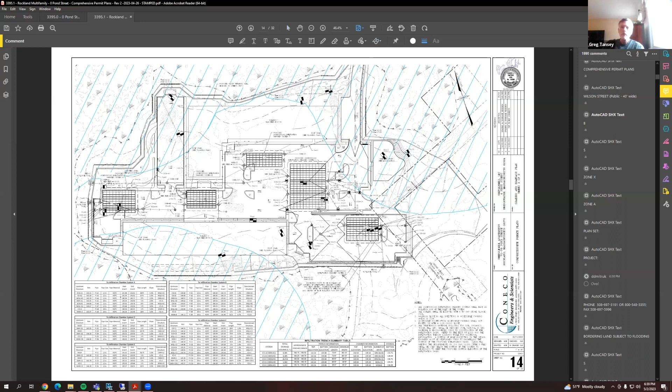During that process, we also performed additional witness test pits with the Novers. Me and Henry were out there, we performed four additional pits. This area underneath this system, an additional pit was performed here under this system. I believe that's the correct test pit location—yes, that is the correct one. A third at this extent, and then a fourth was done at the front of the site. So those are the additional test pits, performed back in February.

They indicate nothing significantly different than the information we had already gathered, but it was confirmation. A witness test pit is usually not required for stormwater, but given the size and scope of the project and Rockland's standards of work, we added those in, and we're happy to work with the Novers and Pat to get those test pits performed.

As Walter described, there had been some modifications to the wetland edge that came across via the Conservation Commission. Those flags needed to get rehung and surveyed. Again, not a substantial change, but given the time that has passed since the original flagging, there needed to be an update.

That update was performed along the front entrance of the site, and additionally around the main campus area of the property. With that, the retaining walls along the front access needed to be adjusted slightly, waving left or right to avoid getting too close to the wetlands, and recentered in those locations.

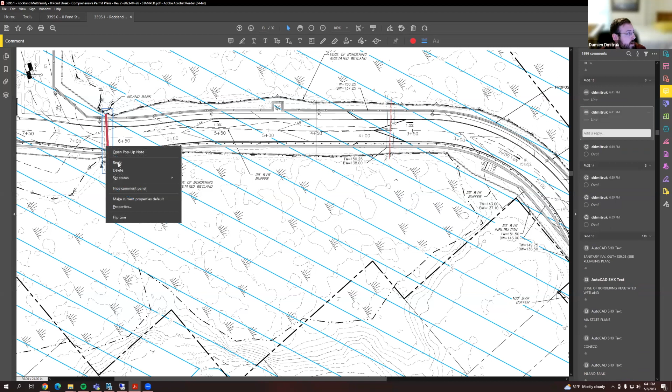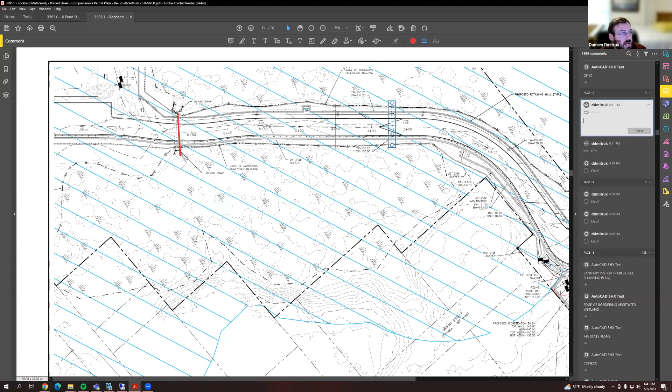There was a concern during the Conservation Commission meetings about analyzing those pipes during construction for their structural integrity. To avoid having those issues come up, we've designed some precast concrete structures that will just overtop those pipes.

So we'll have our existing grade, and this will allow for wildlife crossing, with additional benefits if there's ever a need for replacement or repair of the pipe - easier access rather than having to bring up the road or cause other impacts to the wetlands.

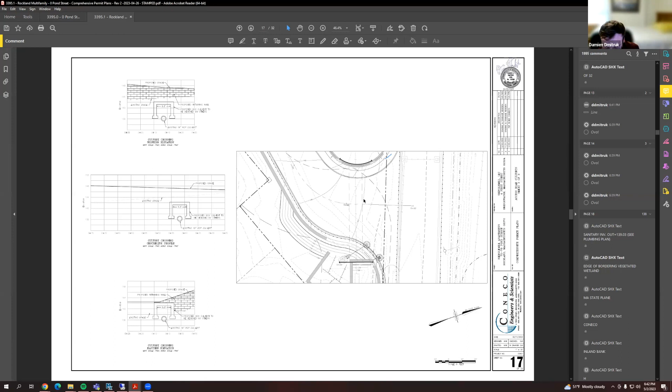So that's a major adjustment that has come from the project. I also went through the drainage design, and then minor things such as fencing.

Let's get back to the layout page. Again, this parking area has been brought in slightly closer, away from the vernal pool here. This lot is still going to be cleared - there's an existing property and home here. We added some fencing around the edge of it, which will be a landscaped area outside the 100-foot vernal pool and wetland buffers.

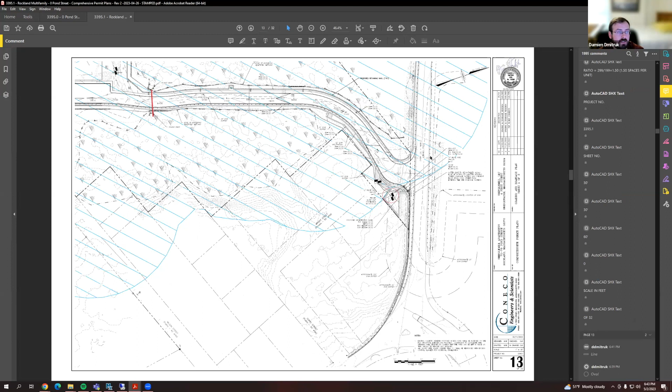Erosion controls were adjusted slightly, so minor changes along those lines were also brought into the plans. But for the most part, the general design intent of the site remains the same - the scope of the layout falls within the same parameters to the greatest extent.

We just went through some further drainage design, adding additional chambers based on the analysis from when the site was peer reviewed. So that's the general scope there.

Again, open to questions, understood. We'll leave it, as Walter stated, to give the board some time to really sink their teeth into it. We understand it was submitted, but wanted to bring it back up into everybody's attention as we're moving forward with the process.

You're on mute, Rob. All right, there we go.

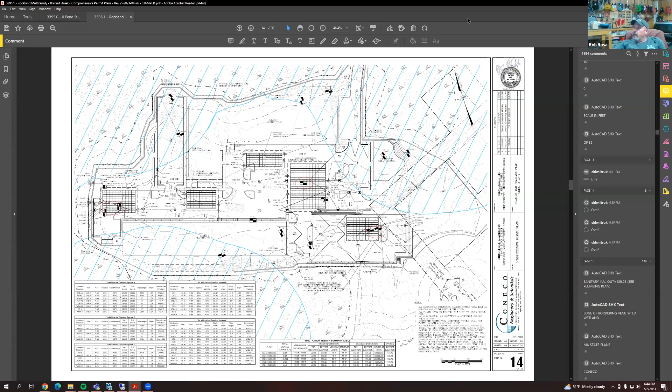Right now, the only real question I have - because I haven't had time to really go through this - is what's going on with that well? We've gotten a lot of complaints at the zoning department about things going on at Wilson Street, people coming in with trucks and surveyors and all kinds of stuff, and we're just trying to figure out what's going on with that well.

That the zoning board was never really told about, and then all of a sudden it happened. That was Mike Toohill actually - I know he's been involved in the permitting of it. I can speak to what I know: it's been brought up with the Conservation Commission and permitted through them. I understand they don't necessarily communicate that over to you, but I think you guys were aware that it does exist and is occurring.

I think it was brought up at one of the previous meetings - sorry, getting confused because we brought it up, not because you guys brought it up. But again, the permitting process is going through the Conservation Commission as required for that portion of the project. The intent is that the testing will be done June 1st, at that moment in time, is what I've been told.

We had to hold off. We've been going through the permitting of it, the installation of the dewatering area, and then again with the requirements associated with the well testing and the drawdown, which has to happen during a certain time of the season. So that's currently what's going on with that.

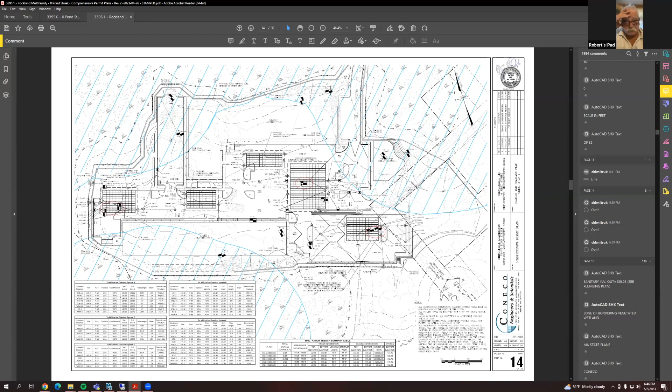Could we get some? The culverts will be designed by a structural engineer at the time. Currently we use precast sizes and shapes that are usually typically readily available. They're three-sided, and they'll be structurally designed.

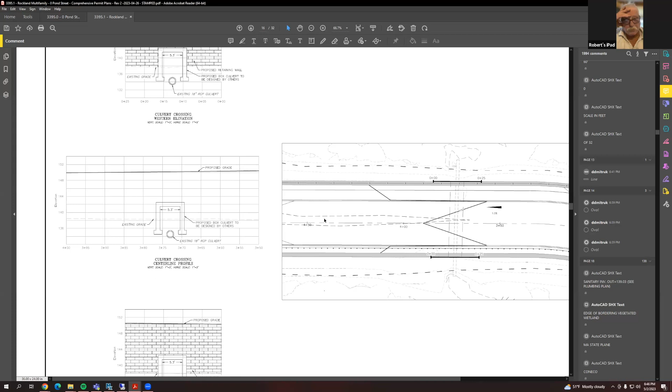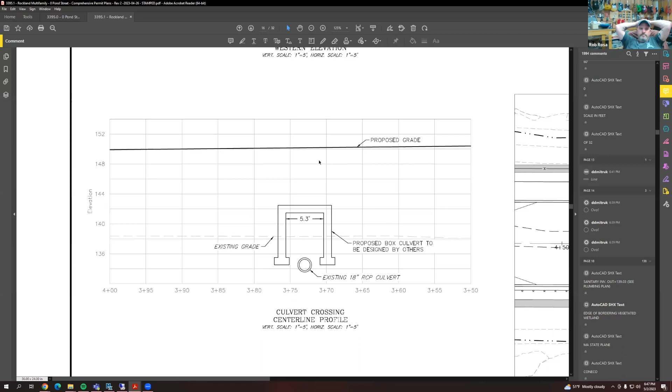How much fill is going to be on top of it? It doesn't really show. For example, this culvert here, we're at an elevation of about 50 over the top, and the top of the culvert is at approximately 43, 42 and a half. So you'll be at about 6 to 7 feet of fill. Maybe do the math on there.

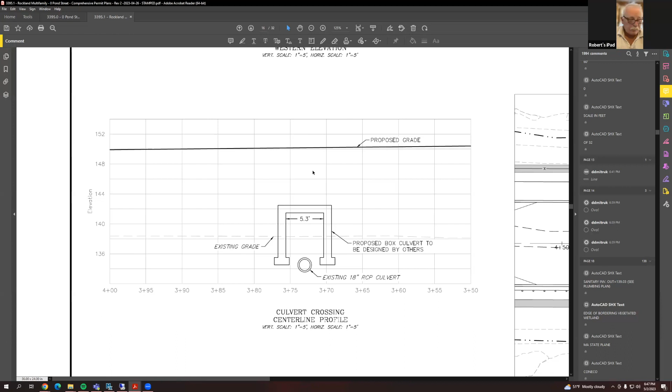The other thing I noticed, and it's probably premature, but in these drawings that we have now, it shows the buildings, and the number of apartments has been reduced.

Yeah, that was the same as the previous submission. We're at 199 units. And what was the original amount? The original from the first submission? Here, let me go back into my folders here. I'm going to stop my screen share.

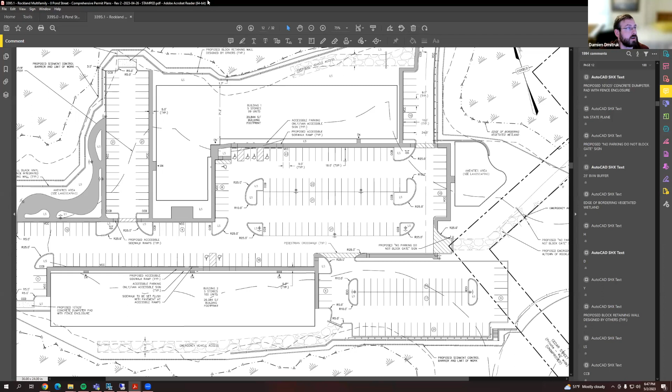236. What was it, 436? 236 is the same number I've been reading every single time we open it. Oh, I thought it was 238. 236 has been the same number on every single one from day one.

I'm not going to worry about that at this point because now it's 199. With that said, that reduces it by what? Roughly 40, 35, yes. Why do we still insist on putting up 5-story buildings if we're reducing by 35 units? What's going to go in those spaces?

I believe amenities were added, such as indoor amenities, rock climbing walls, and other useful areas for residents. Rick Lincoln has found that most of those amenities get used rather than a lot of the outdoor amenities. The indoor has greater use, so reducing the number of units reduces traffic flows and things of that nature. But the usefulness of the buildings at those heights is still pertinent.

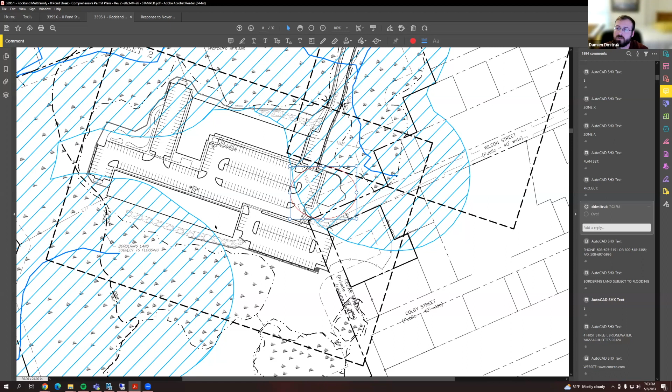So again, that's this area down here in the bottom right-hand corner. I'll move this circle over here - this is the amenities area, which is new on the landscaping plans, with playground areas, jungle gym type use. As for the building, the indoor amenities areas, I believe that was submitted during the November submission - there haven't been any changes to that. That information was all supplied during that submission, hence why it isn't in this current plan set. If it hasn't been sent, I can work to get that information over to you guys as soon as possible.

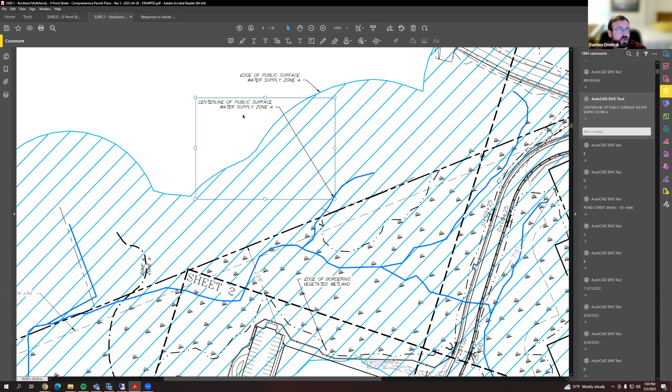Another note towards what Mr. Tansey was talking about - these tributaries are there, but it's actually the center line of the public surface water supply zone A. They're not actually defined tributaries. This is what DEP has given us as their requirements for the edge of zone A. There is no defined tributary that goes through that area - the water travels through the site as such. So that's just the center line of their zone A, at which they have jurisdiction. Just clarifying that concern about it going through the wall at that location.

And then I think the final question on the sewer, I would have to defer to Mike or Don Nagel on those questions.

Understanding that the DEP took a good hard look at this with the applicant for a considerable amount of time, there's a lot of dispute about it. Now, a tributary has a definition - it talks about a defined water course in the ground, moving under a hydraulic head, and these tributaries have moving water in them flowing under a head. That meets the definition of a tributary. The DEP took a good hard look at this mapping and they're saying that is a tributary, and that's going to require some action - you can't dam it off. I don't know why you're saying that it's just the center line of the zone A.

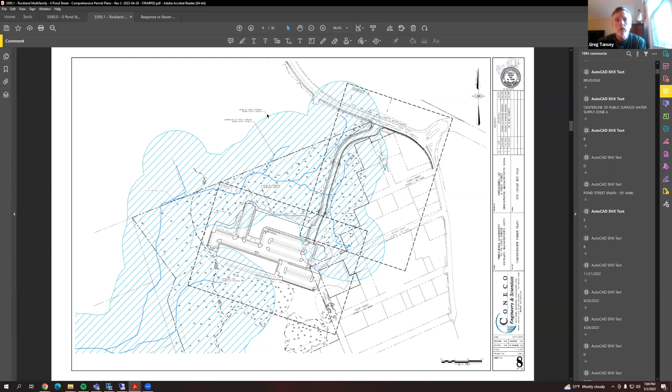That is a substantial bifurcation of a very sensitive area, a substantial wetland that has a vernal pool in its proximity, and it has basically a network of tributaries that produce a zone A sensitive area. So I just don't see how or why you would want to dismiss such an important environmental benefit.

You've got to develop land responsibly, and damming off a tributary with the walls that you are proposing and not upgrading culvert crossings to meet the stream crossings, it quite frankly bewilders me. There are some real issues with this project.

The last thing that I want to go over, and I would like, I think the board should give, or try to give the applicant some direction. And this is dealing with parking.

What I've noticed, okay, back in January 4th of... February 19th, 2021, there was a parking count of 414 spaces, okay? Back then, we were proposing the 236 units, or my records said 238, but that's immaterial. So that's a parking ratio of 1.75, okay? That was in February of 2021.

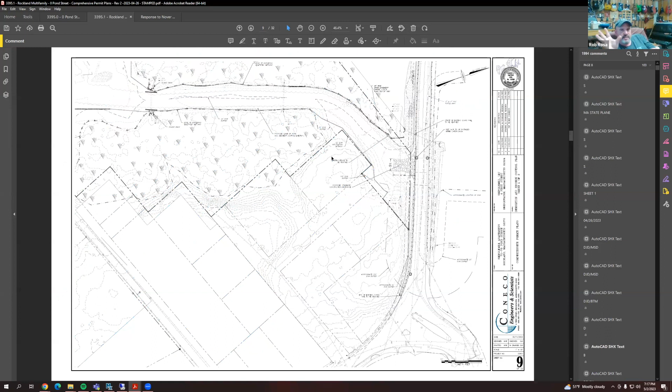Damien, can you do us a favor? Can you pull up the plan and show us the areas that you've modified where you brought the pavement back, in effect reducing the number of parking spaces? I think that would help everybody understand it, because as you're going through the Conservation Commission, as the Zone A is changed and stuff like that, obviously the impervious areas had to get decreased to some degree. Is that something you can do?

Yeah, so I'll pull up the plans here - past plans - I'm not going to shuffle through all of them. But in general, yeah, I can give a general scope of that. So the access road has been tight between the wetlands as we've been coming through this. We previously had parking up in this area, back here.

The fire department asked us to leave some of that area - they found it made it more difficult. They'd rather have just clearer access, a little bit of separation from the building there. Again, reduction in parking allowed that area to also become some landscaped, usable, amenable area. With the building being here, parking can be decreased in almost little snippets as well, right?

So along this area, there was that building that came across here. We used to previously connect this area, and parking came down that way. But due to access - the thought of vehicles driving straight down here across the fire access and things like that - we thought that putting in some sidewalks and some safety measures there aided in that.

And again, in the way that the grading and drainage kind of worked out, it's a moving puzzle, right? That's part of being an engineer - working through the different aspects of how the site needs to change. I believe the parking used to take up a larger area over here. This is mostly where that impact has been reduced to the greatest extent. So let me really highlight that area over here.

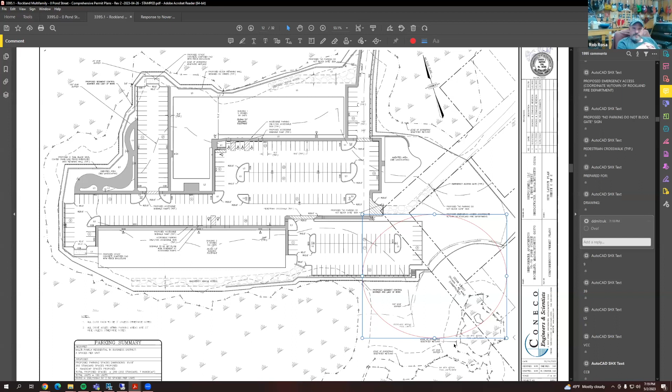Along this edge, and then again further down towards the buffer zone - there was previous parking. This is probably where the most reduction has been done, near the vernal pools, and also along Wilson Street is where the major amount of reduction has occurred.

Does that answer, does that help out, Rob? That helps out me. Mr. Tansey, does that kind of give you a slight idea as to what's happening? No, I know - I compared the two plans and I saw where the reductions were.

But the question that I have for the applicant is, are you aware of 301 CMR 11.03, 6B15, under the transportation MEPA thresholds for filing an ENF? It says construction of 300 or more new parking spaces at a single location triggers MEPA. Now you have 299 - did you arrive at that parking count to avoid filing with MEPA?

Again, the parking count has been based off of the ratios associated with the buildings.

Are you familiar with the Viva Apartments in Bridgewater? Not specifically. The Viva Apartments in Bridgewater are a 5-story bar building apartment complex. In fact, it looks like a sister to this project. And they've got studio apartments, 1-bedroom, 2-bedroom, and 3-bedroom apartments, much like what you're proposing here.

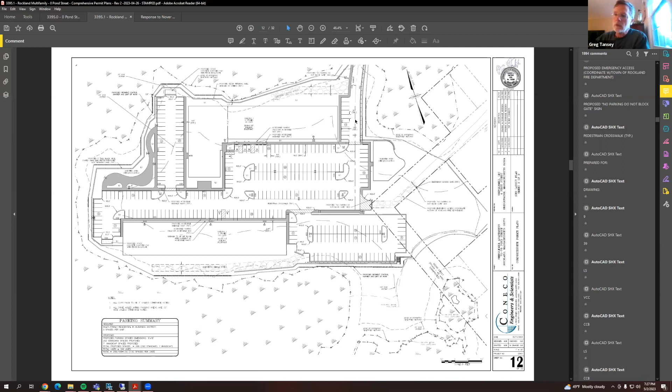I've probably said enough already, but I think we need to really take a hard look at a very important factor: if you don't have adequate parking, it's a health hazard. It's a burden on the police.

It just has to be realistically looked at based on scales of economy, not trying to avoid a MEPA threshold. I agree with you 100%, Greg. You hit the nail on the head, absolutely.

Damien, can I ask you this? How many total bedrooms are in the place? Total bedrooms... yep, let me check.

We can come back with more information on this next meeting. Let me just calculate it from the architecturals. It's not something I necessarily have off the top of my head. No, that's fine, that's fine. That's why I asked, I knew you wouldn't.